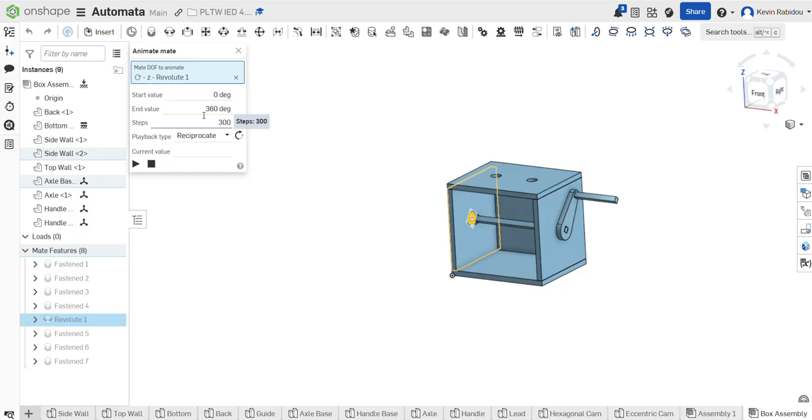All right, in this video we are going to see how to make the handle and axle. Last time around we built the box. Now we are going to find a way to put all this together so that if we animate this, we'll have our rotating axle.

I'm going to go ahead and delete these parts so we can get back to where we ended off last time. So we have this box. Now we're just going to insert a few parts so we can get to work.

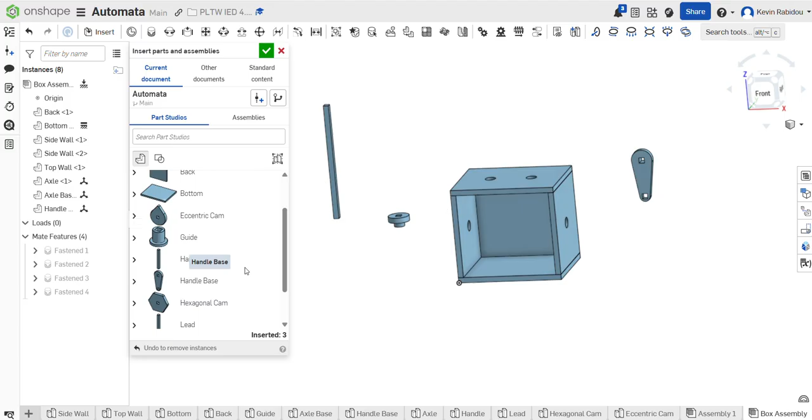So we need everything for our axle: the axle base, which is going to go on the left-hand side, the handle base, and then the handle. With this axle and handle, we want this thing to be revolute, because we want this rotating on the axle.

The first thing I'm going to place is this little axle base, and the first part is going to be revolute. Once I make one thing revolute, everything else I'm going to be fixing to this base, and it'll rotate all as one. As long as we have one piece that is revolute, all the others can be fixed in place and will act as one piece, since they are all connected.

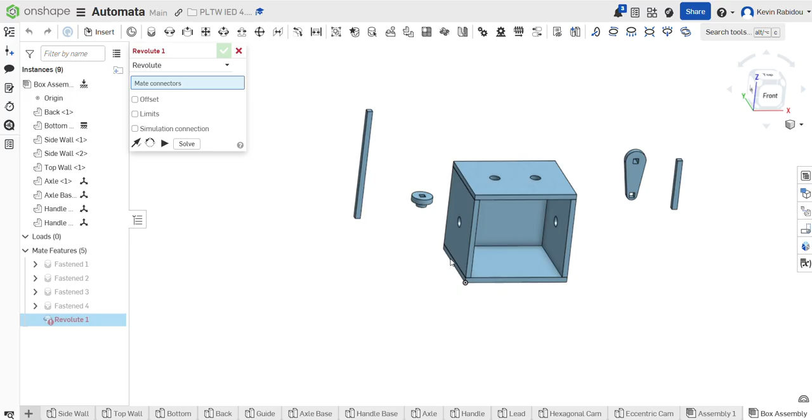Now that I have my revolute selected, I have to find the faces that I want to piece together. This is going to be the outside, and we want that flush against, so I want to select the inside ring of my little circle.

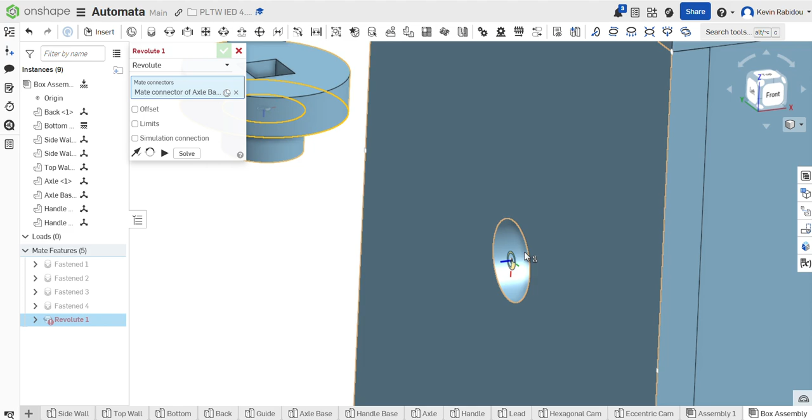Either you can find a way to grab that edge, or get on the face, shift, and then select that edge. Then come over here and select the ring of that circle, so we want those two pieces to line up together. You may have to flip the primary axis, and then I'm going to hit my green check mark.

This thing should now be spinning in place, can go back and forth. I'm going to hit Control Z so it's back into its original position. So we have that little axle base in its revolute position.

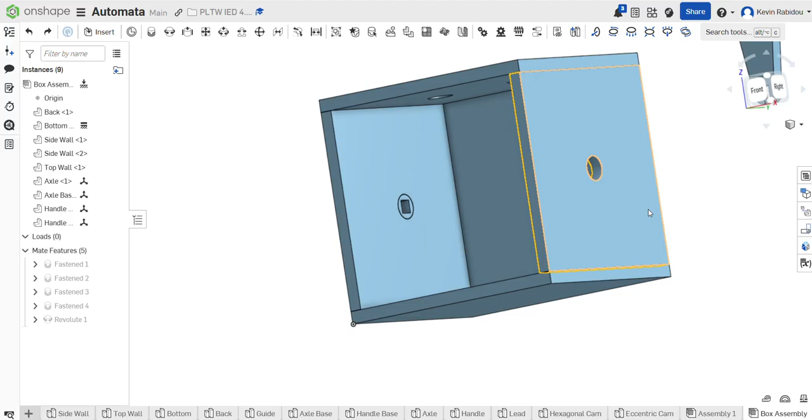The next thing I'm going to do is actually put the axle in there. I want to connect it across so I know where this will go, so I'm just going to fasten it together. I'm going to hit Fasten Mate and select the outside edge.

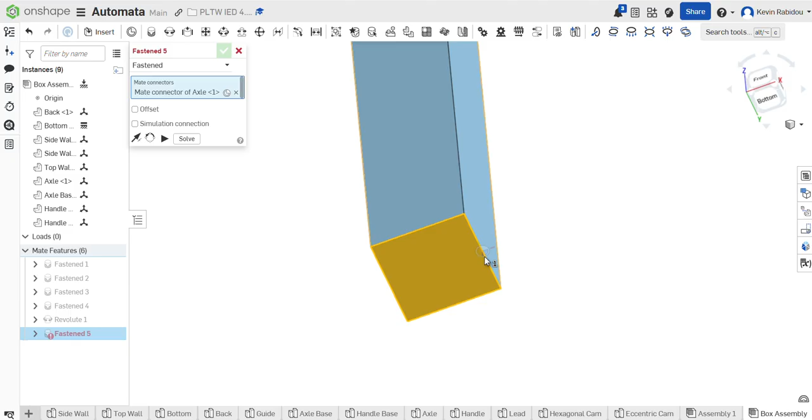I don't want to grab the middle. I want to grab one of the edges of this axle, and then select one of the edges. As we see, this is a square axle, we have the square insert, so just like I selected the edge, I want to select the edge of this piece.

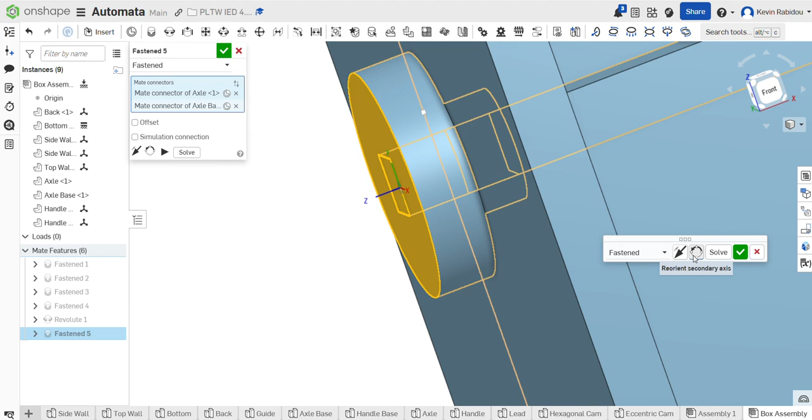Now I may need to flip - instead of flipping the primary axis, which is going to jump it around, we want to just reorient the secondary axis so that it just twists into place. You'll notice that it's probably just off a little bit, and for the purpose of this model, we are going to be okay with that.

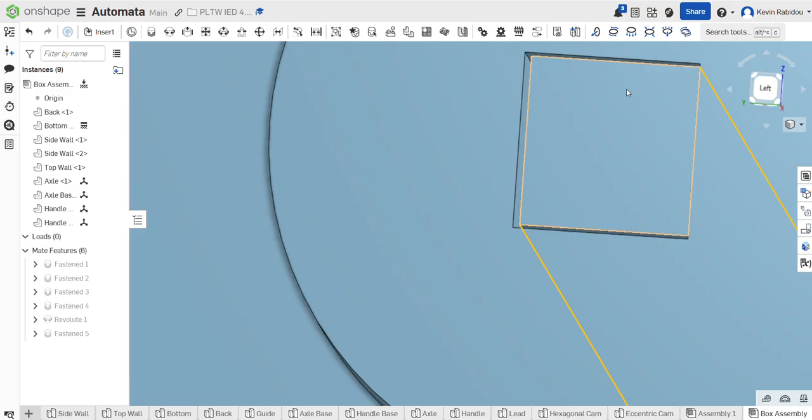We will be able to do some shifting around, but the sizing is just a little off for when we do the 3D printing, and having a little bit of tolerance so things can slide easier. But for this purpose, these things are attached together, and we are going to be happy with that.

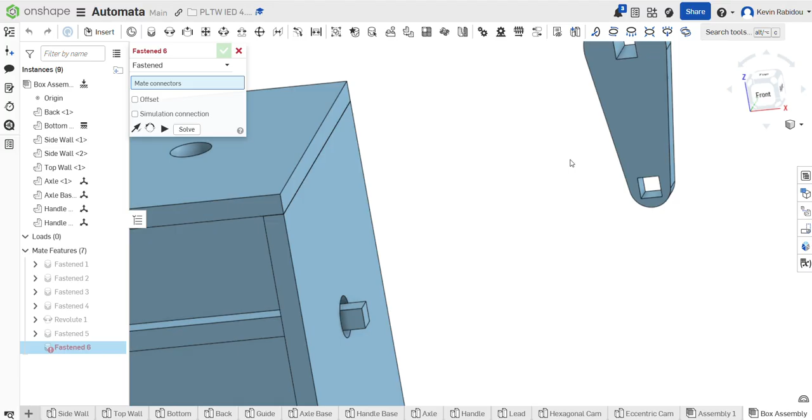So the next order of business is going to be attaching the axle handle. Just like we did the axle to the axle base, we are now going to fasten mate the handle base to the axle itself. I'm going to select the outside edge of that handle, and then come select one of the outside faces of my piece.

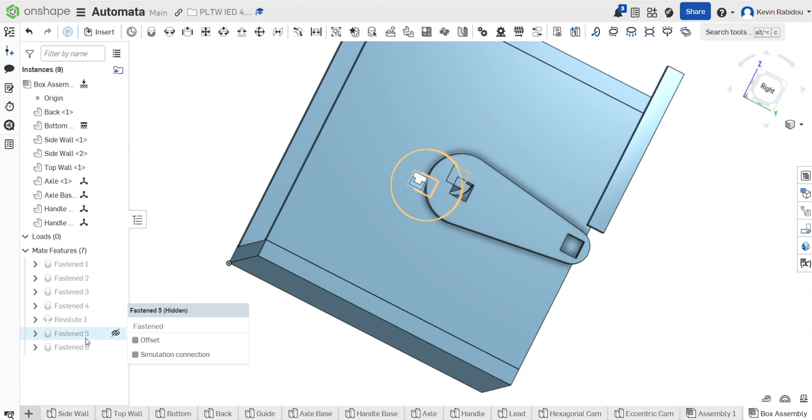Now you'll notice that if we just hit the green check mark, that does not look very pleasing, right? Our squares do not line up. So I'm going to go back in here, delete that mate - let's just delete this thing altogether - and we're going to redo that.

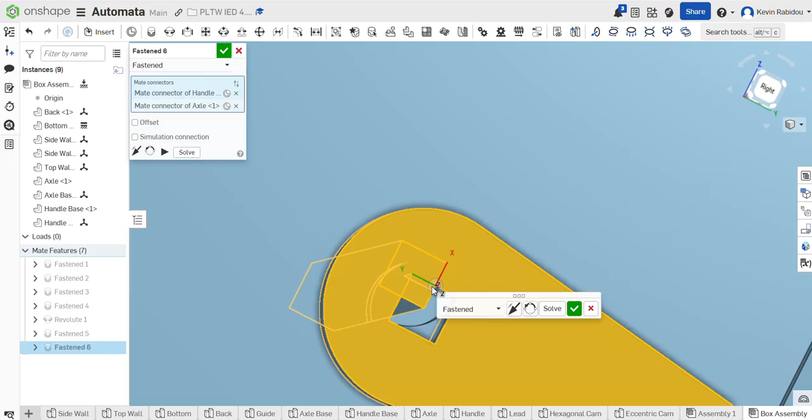I'm going to hit Fasten Mate, come in here and grab the edge, and then go back and grab one of these edges, and we're going to have to reorient the secondary axis until we get it nice and square and fit. Now we'll notice that this axle goes right through the piece, which is exactly what we want.

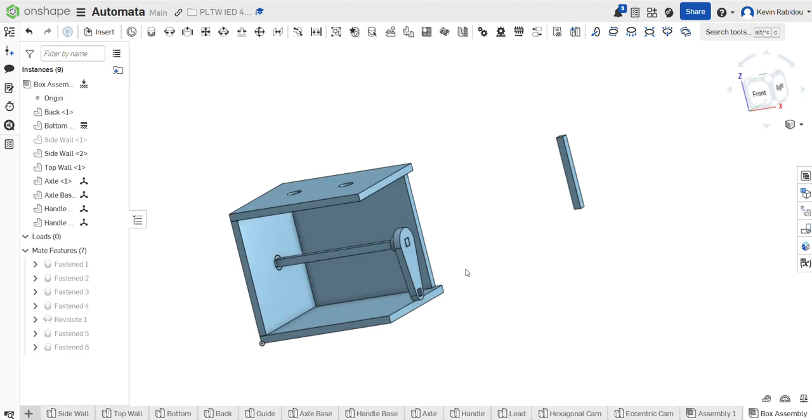Now the last thing we'll need to do is attach this handle into that little bottom piece. In order to really grab all the pieces and specific faces, I want to first start by hiding the side wall, because I'm going to need to grab this inside, one of these inside edges. If I were to have that side wall, you'll notice you won't be able to do so, so we're going to hide that.

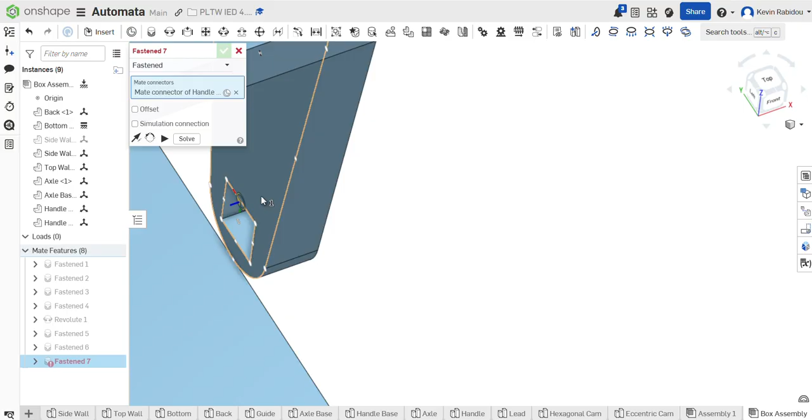Now I'm going to fasten mate this together. I'm going to come in and grab one of the edges, then zoom in and again just grab one of the edges. We might just need to reorient the secondary axis. And there we go - we have our full axle put together.

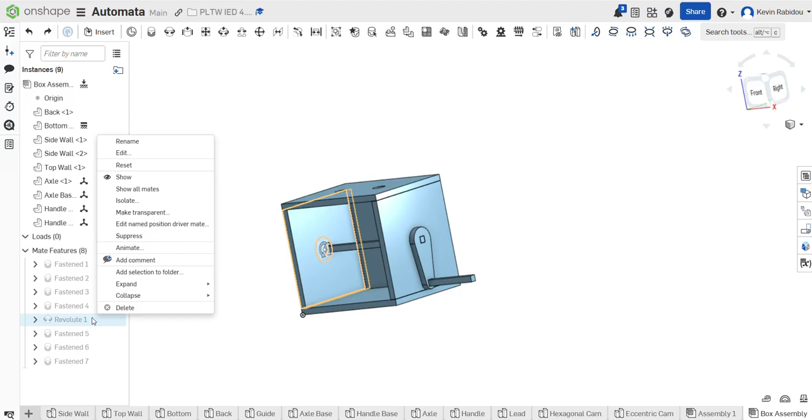Now I'm going to put that sidewall back in. You can test it by grabbing it, or if you want to do it the nice fun way, we can go to animate and hit play, and notice how it is all acting as one piece. It is all going together.

All right, we had one revolute and then three fixed mates, all making this one piece. And that is how you put your axle together.